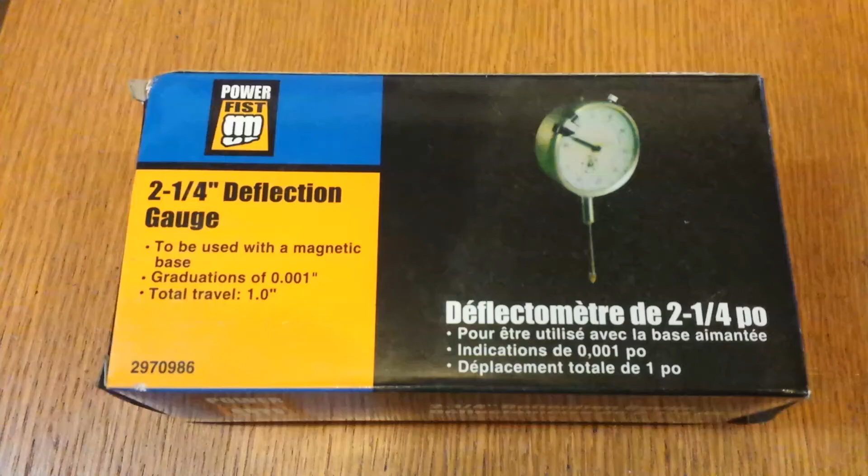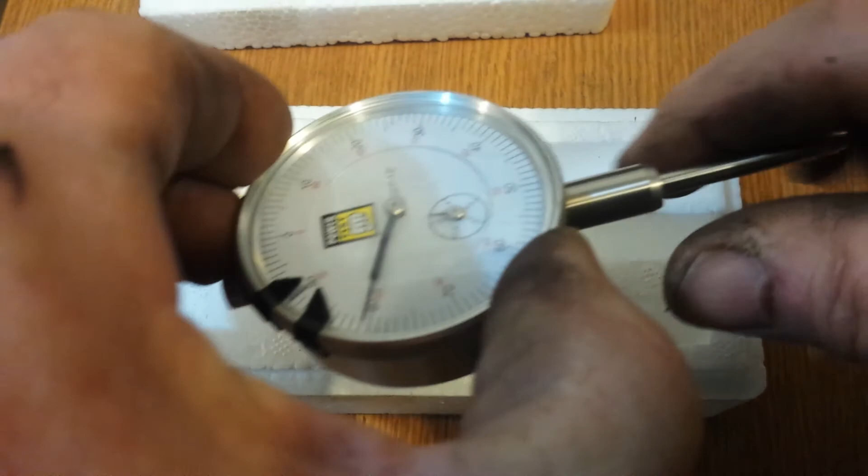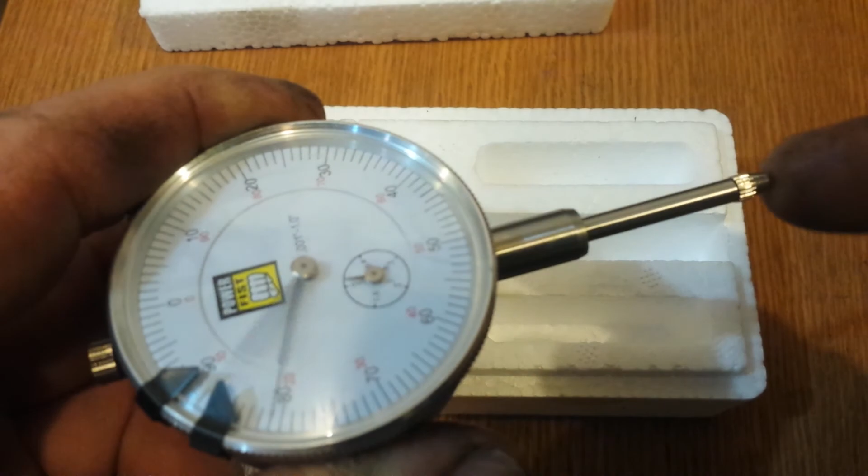Last week I picked up a little dial indicator here. Actually, I got two of them. These were $11 or so. My plan is to mill off this tab and install a magnet, so I'll have a cheap banjo indicator for the longitudinal movement on the lathe. I have one at home with 2 inches of travel, it's really handy, but I don't have one here.

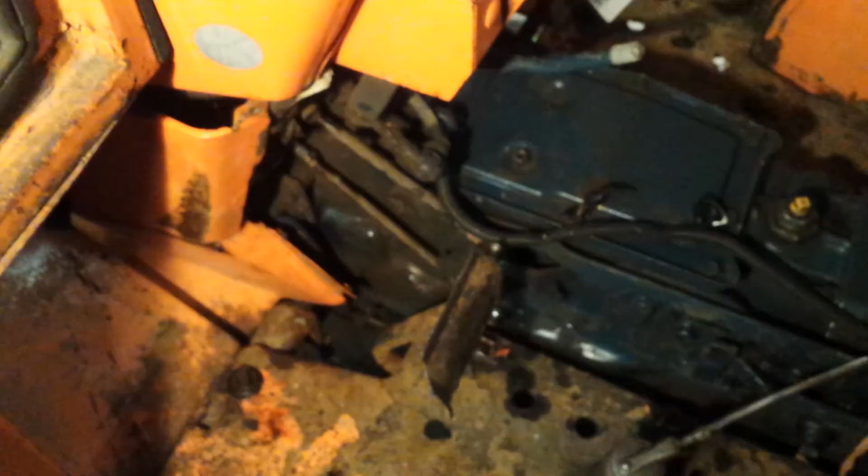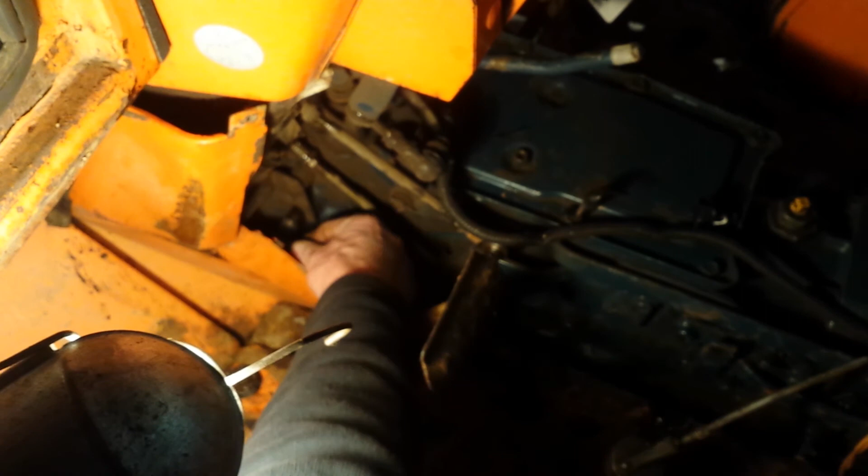And I got some bad news with my tractor. It's an L2850 Kubota, around 1987. This is the hood, the cover for the engine. This is the tractor I used to load salt with for the last 15-20 years. There's like no resistance at all with the clutch pedal here. I pulled all the sheet metal off and got in here and looked at this. It's moving around freely, I don't think it's supposed to do that.

I think if this sheet metal wasn't here, I could probably pull it right out, but it's not. The clutch isn't releasing, so we're at the point now where I think we're going to have to split the tractor. We had trouble with the PTO on this machine about 4 years ago, so we just haven't used the PTO, that's power takeoff on the back of the tractor.

I got some drawings of it, I'll show you. So this is the book I have, it's a WSM, which is a workshop manual. It covers many different models, you've got the L2550, the L2850. GST stands for glide shift transmission. Both these tractors came with and without a glide shift, I think. The one I have is the L2850, and then there's a bigger one again, L3250. Ours does not have a GST glide shift transmission.

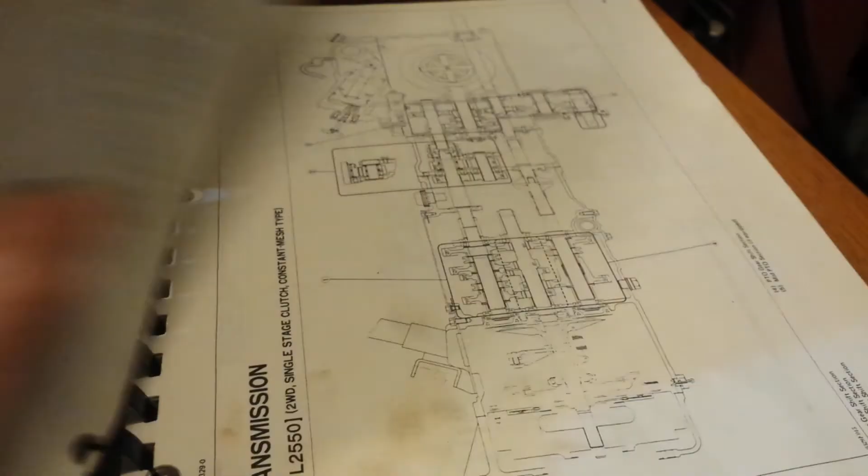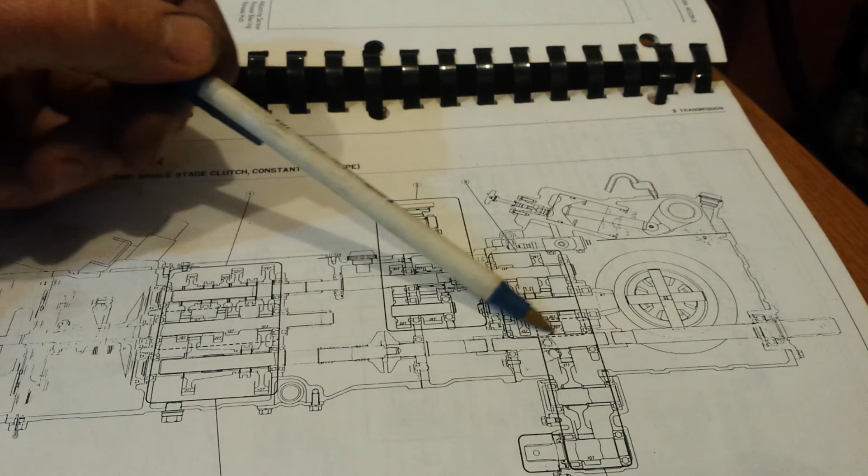So here's the transmission. And the noise that's coming from the PTO, I mentioned it's got a problem. I think it's a bad bearing up in here. There's 5, I think, I can count 1, 2, 3, 4, 5, 6. It's not this bearing, and I don't think it's these. It could be this up in here, it could be this bearing, could be something in here. I don't know what it is. Could be this bearing, it's something way up in the front.

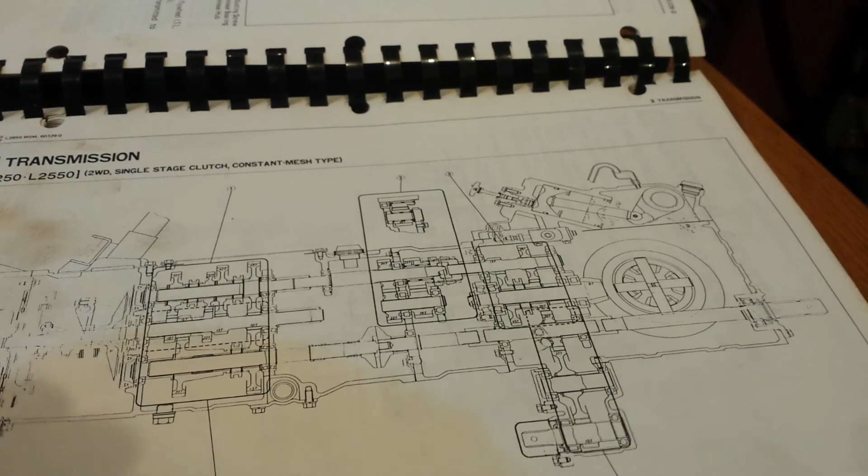You can hear it. And the next page here is the clutch. This is the wrong transmission, this is for the 2250 and the 2550, but they're almost identical. That's the 2850 right there, almost the same. So there's nothing wrong with the shifting, the 4-speed transmission, and it seems like the PTO works

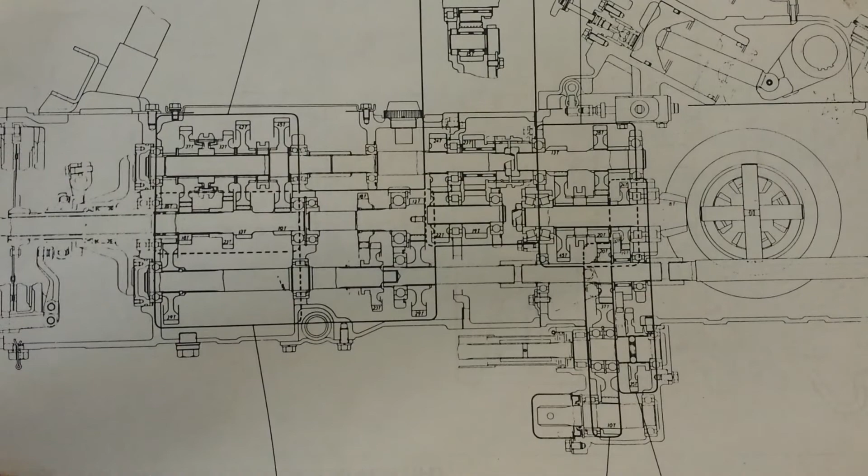both in high and low range, so that's not the issue. It's some sort of bearing down in there. But up top, everything seems to be fine, and there's a problem in the clutch area, and I have a picture of that too.

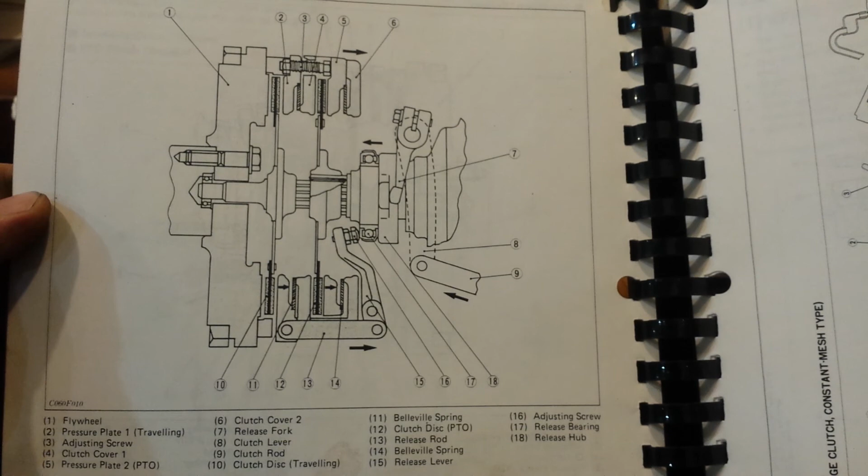So here's the clutch, and it's a little more complicated than a normal clutch. It's got 2 clutches in there. So one flywheel, 1 release bearing, 1 release fork, and 2 pressure plates. You got pressure plate 1 right here, the traveling, that's your transmission for the power of the back wheels, all 4 wheels, 4-wheel drive. And then you've got pressure plate 2, that's for the PTO. So a little more stuff than an average transmission.

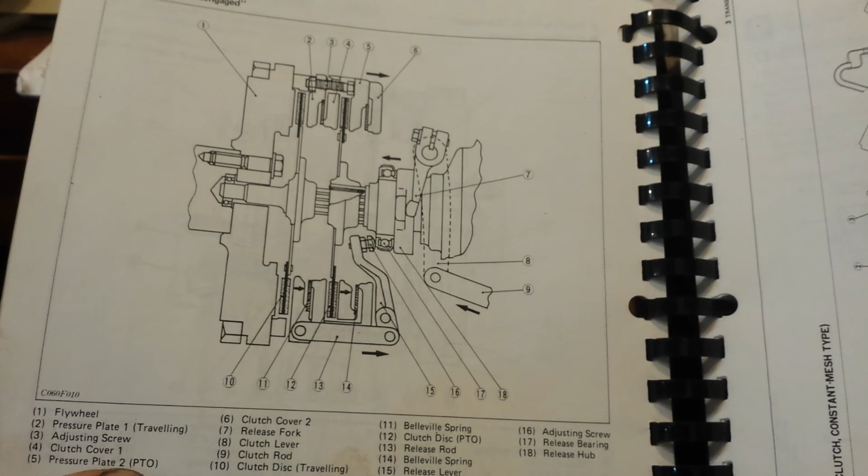So this is going to probably be an upcoming series, maybe a couple of videos on how we're going to fix this. I didn't expect to have to do this. It just kind of stopped releasing there about 4 days ago.

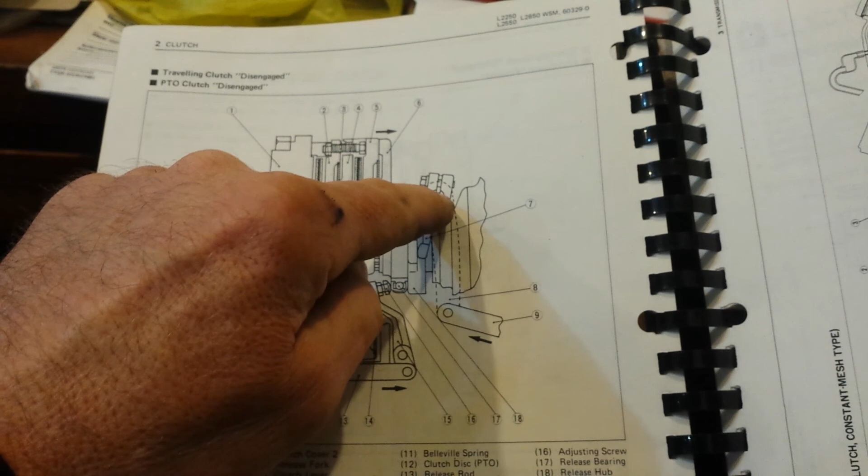So this has to work, this tractor. It's what we use to load salt with. That's the piece, the dotted line here is the piece I was pulling in and out. And there's a shaft, the shaft goes into that shift fork, the release fork, number 7 here.

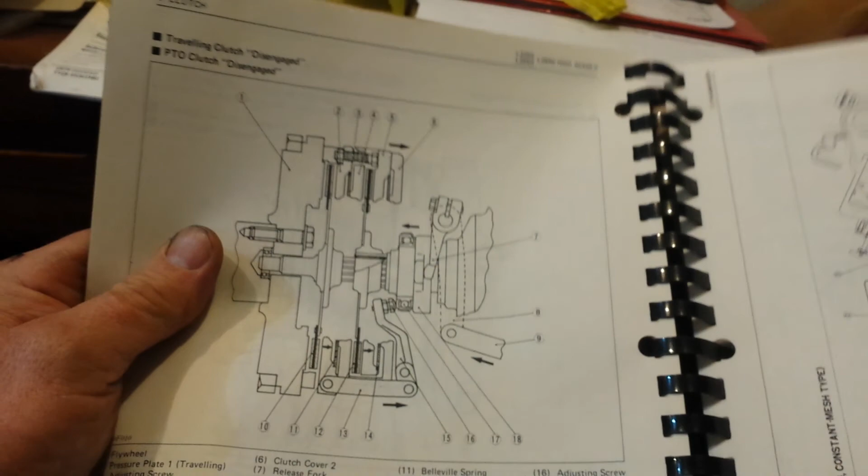And I think the connection between those two is there's something not right there. Either a weld is broken, or the gears have stripped, or there's a keyway that's fallen out, or something, I don't know. I'll know when I get in there. But I think while I'm in there, I'm going to buy a new release bearing and 2 clutches, and maybe resurface the flywheel, maybe get a whole new pressure plate.

I don't know, it's going to cost some money, but it's been 25 years. So if I'm going in there, I'm going to do all the work of splitting that. I might as well do everything right.

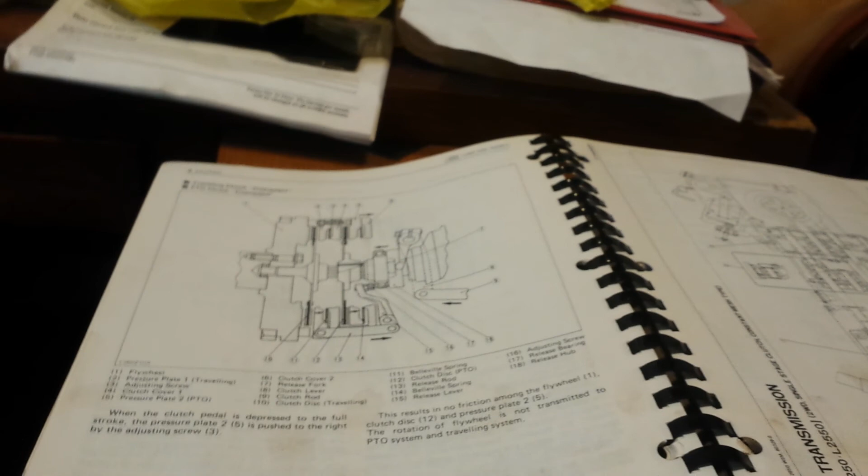That's coming up. I got a bit of bush hogging done two days ago, and yesterday I spent the whole day bush hogging around a perimeter fence, a chain link fence. This is the tractor, the L2850, the one I normally use for that. It's underpowered, only 28.5 horsepower, but it's so small that I've got lots of clearance. In the video you'll see the chain link rubbing on the tires, and the barbed wire on top is maybe 4 to 6 inches from the cab. There's not room for anything in between, and it's a little stressful doing that, but that's what I was using because the alternator just came in.

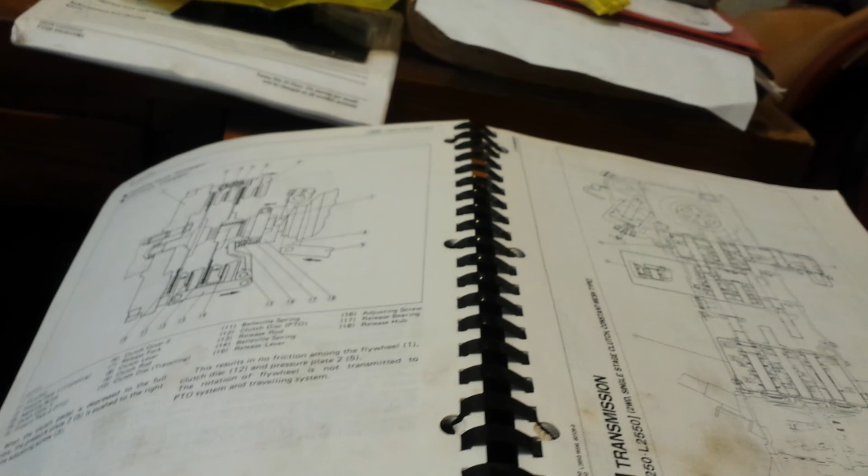I got an update for you on the M5700.

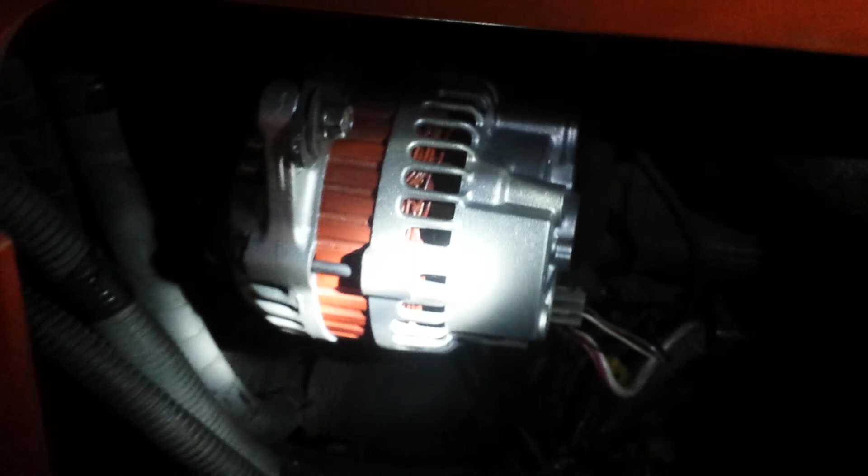Okay, I'm out here in the dark, apologies, but right in here is what looks like a brand new alternator. We just reused the old wires, plugged them in, and I cleaned everything. It's rebuilt, so they managed to get it rebuilt. I didn't have time to try and modify something to fit. I'm out working every day, so it's back, it's rebuilt, not hauled out to our site yet because it just came out of the garage today. I'm out here in the dark with just a little flashlight. It would have been out there today, but we were busy looking at that clutch.

So yeah, I'll show you a little bit of my bush hogging, and this will be out next time you see it. I'll probably be plowing snow next week.

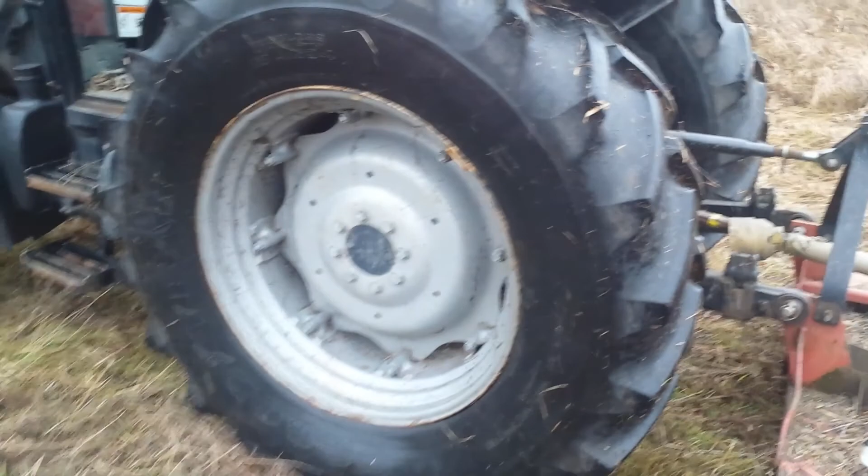But yeah, the old Case tractor, it's working great. And now I'm going to have to switch to a chainsaw. But gotta get it done, man. This tractor's too wide, and because the alternator's not in for the M5700...

Actually, what I prefer to use of all is the L2850, but there's a problem with the PTO on that. So you see the tires are even with this. On the L2850, the tire would be over here, so I can get really close to the fence without the tires rubbing on the chain link. Doesn't seem to be damaging them, but...

Yeah, and then once in a while I bump onto a post, a steel post. On this side the posts are on the inside, so on this side there's just chain link, so it's not so bad, but you've got to be careful you don't knock a post over. So the bush hogging's what I've been up to the last day and a half or so.

This tractor, it's our best cold-starting tractor. At -20, this thing will start without being plugged in. 3,237 hours, and really well built, little tractor. This thing's built like a tank. Haven't really had to fix very much on it, but while I'm going in there, you know, we're going to make a decision by tomorrow morning whether we're going to go in or not.

Splitting the tractor means a lot of work, a lot of disassembly, a lot of parts come off to get at that. But having the issue with the PTO kind of motivates me to do it, because to get in there and do it, we're basically killing two birds with one stone.